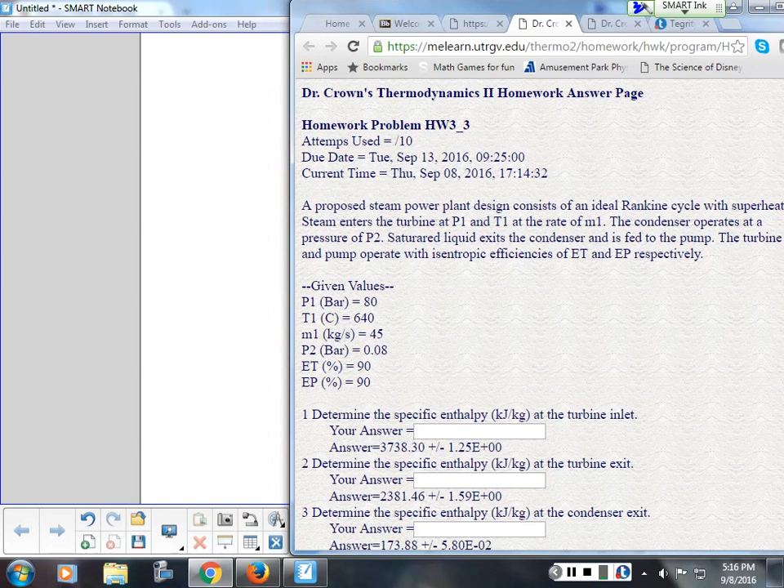Let's see if we can copy that problem back on top here somehow. I'm going to try and push it off to the side. I don't think I need the text anymore, just these numbers. If I can figure out how to get this... I don't know where it went, it threw it off somewhere. Come back. Very nice. All right, I'm going to pause this.

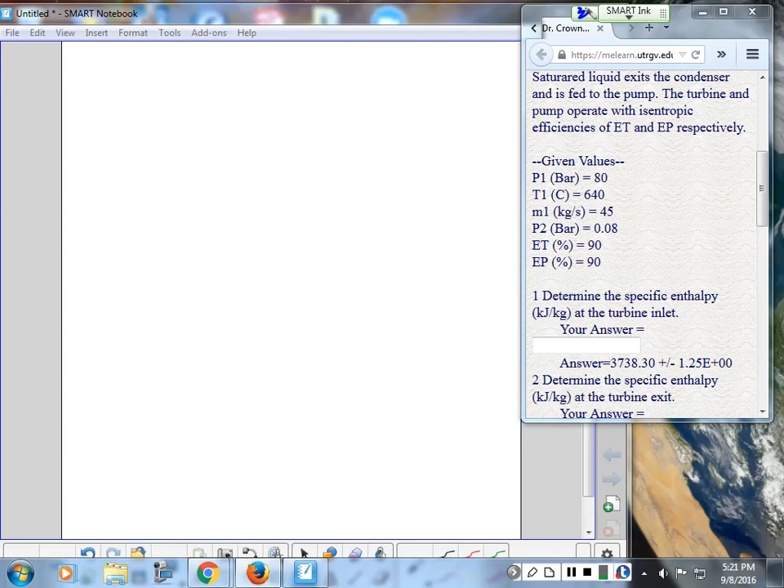So P1, T1, M1, P2. Let's just draw a quick diagram.

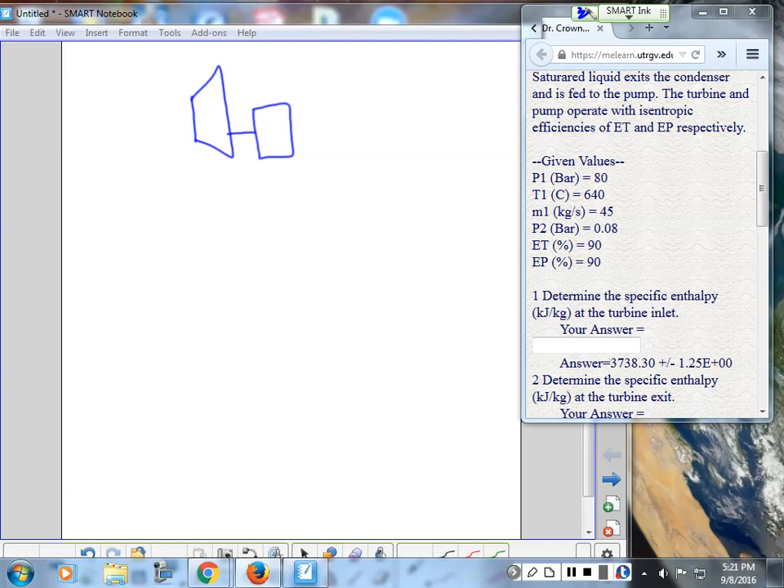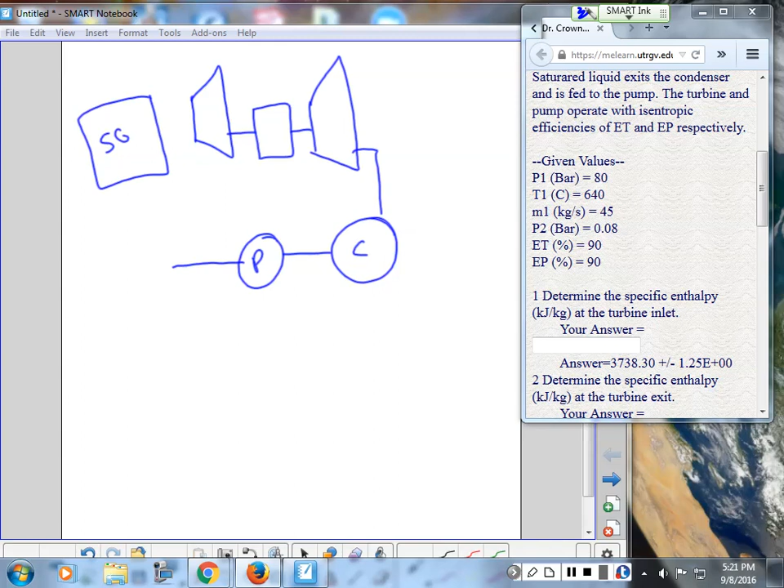Turbine, then it reheats, right? Is that what this problem was? It's been so long now, can't remember. And it goes into a condenser, goes into a pump, goes back to our steam generator, I think, or it doesn't even have reheat, does it? I better reread the problem.

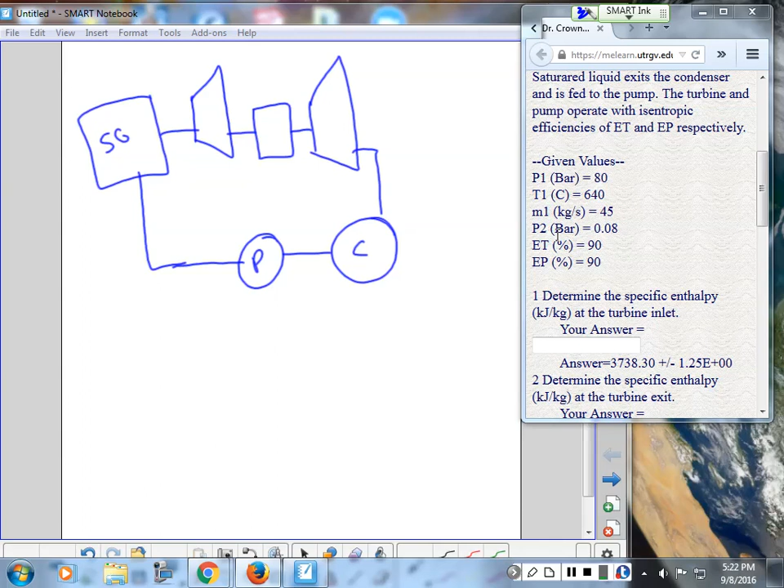Oh, with superheat, not reheat. Okay, so this is getting ahead, this problem would be for the next homework set. So this first set's really easy, it doesn't have reheat, it just has superheat. The only thing it has is isentropic efficiencies.

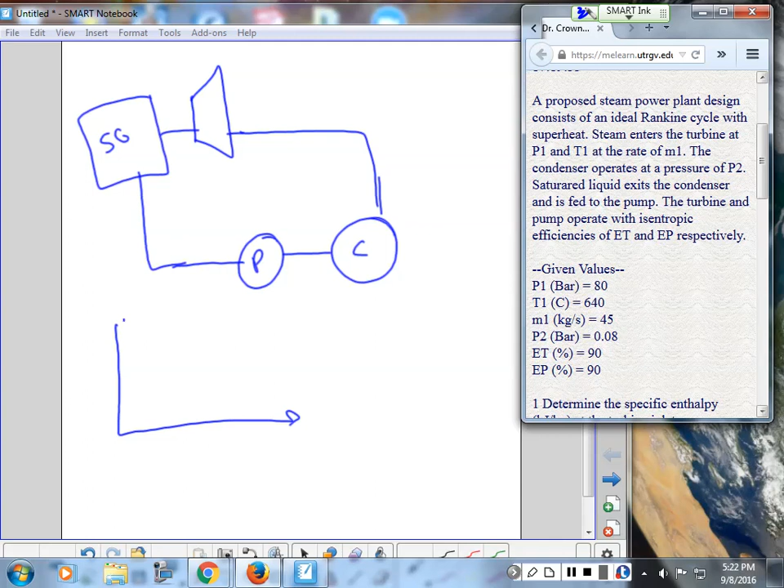So TS diagram: if I label that state 1, state 2, state 3, and state 4, draw a saturation curve. It's superheated, and it expands. Maybe it's saturated vapor, maybe it's a liquid-vapor mixture, so this doesn't have to be right there on the line. And then state 3, right there. State 4.

All right, so state 1 is easy. I know H1 is a function of T1, P1. Go to the superheat tables, look it up. That's easy, so superheat table.

All right, state 2 — I'm going to call this state 1, state 2S. I'm going to assume it's isentropic. Then the real state 2 we'll have to get. So state 2S says S2 equals S1, that's my assumption. And then I'm given P2, so my H2S is a function of

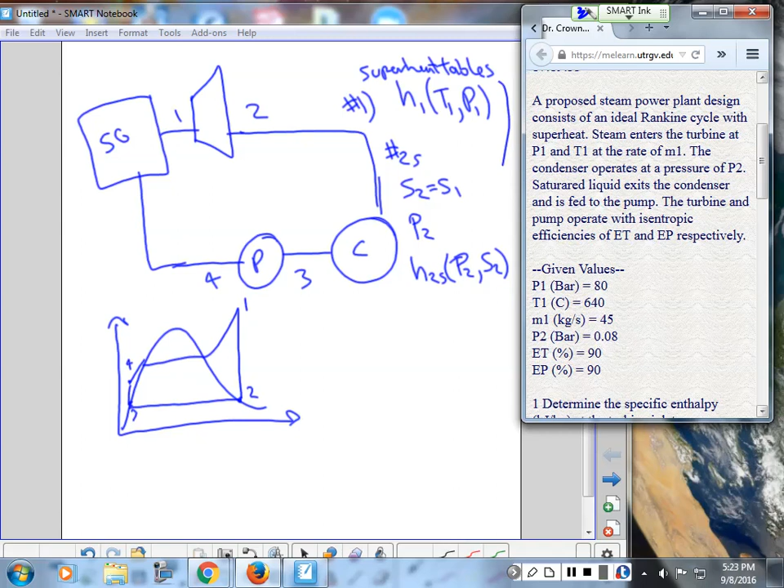P2 and S2. Again, superheat tables to find that. So I know entropy and pressure. Instead of looking on the left column for temperature, I look for entropy, and I'm going to have to interpolate almost always to find enthalpy.

Then, how do I find the real one? Well, the turbine efficiency, which I called ET, is going to be the actual output over the ideal output. So the actual is always going to be less than the ideal. So my efficiency is less than 1, so this is 90%. So what is the ideal output?

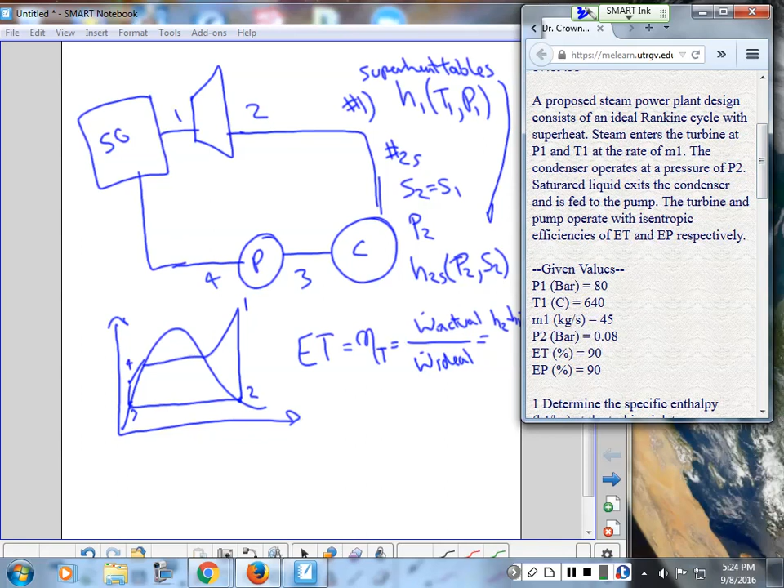So H2 equals the efficiency of the turbine times H2S minus H1, and then, well, that's actually H2, H1 — I guess that's a negative number. This is H2S, so plus H1. It's kind of a weird way to write it, but that's all right.

So this is a negative number times this, so it's less than H1. H2 is always going to be less than H1 because I'm getting the actual work. So this is kind of strange, a negative number over a negative number. I really should write it H1 minus H2, inlet minus exit is the work. Yeah, that's the way it is. So I just switched those, but it still works with the equation — it's just negative, negative of negative, so the negative work over the negative ideal. It's just kind of strange the way I wrote it, but this equation is still fine. Ideal is the same as isentropic, right? Yes.

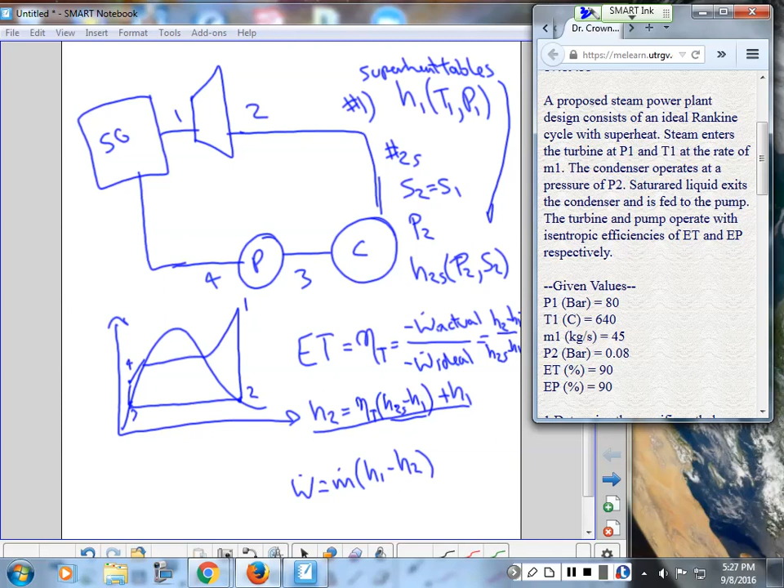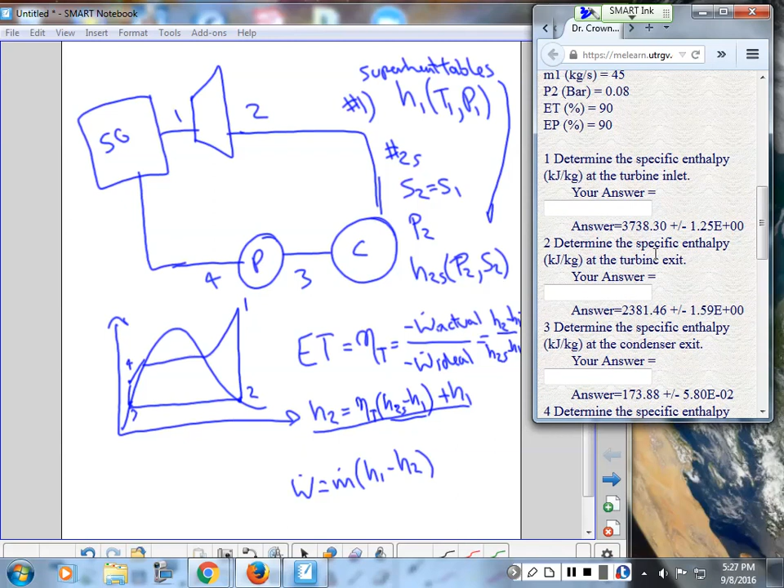So now I have H2, which was one of the first things asked for. Then we need to determine the specific enthalpy at the turbine exit. The inlet was easy, that was H1, we found that in the tables.

Next, determine the specific enthalpy at the condenser exit. We did the inlet and the exit already. Now the condenser exit is easy, that's just saturated, so H3 equals HF at whatever we're given, temperature or pressure. It's P2, right, at P2. So at 0.08 bar, we go to the saturation tables and look up HF because it's right on the saturation curve.

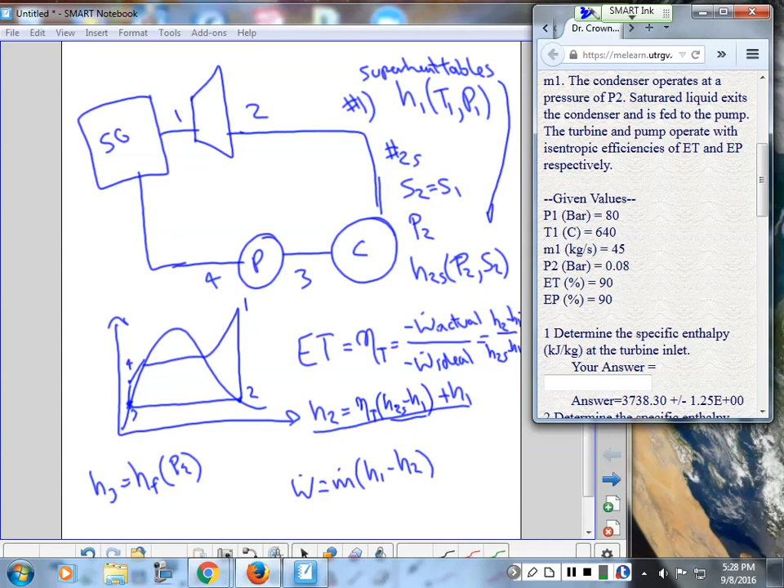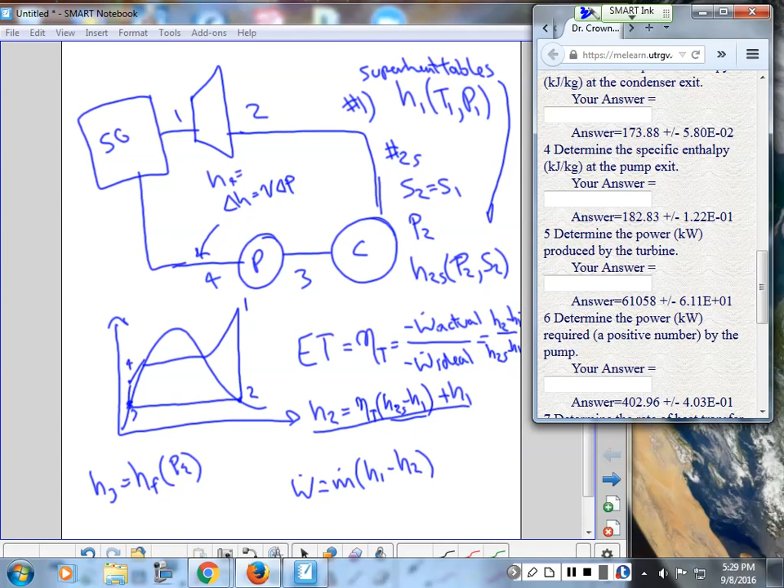The next thing asked for is the specific enthalpy at the pump exit. How do I get that? There's a number of ways to do it, but the work for the pump, if it's isentropic, is V delta P, so delta H for the pump. That's if it's isentropic. So H4 would equal H3 plus V3 times P4 minus P3.

Which V do I use? Well, it really would be V delta P plus P delta V, that's the definition of delta H, but we're saying the specific volume doesn't change in the pump because it's incompressible, so P delta V would just be 0. This is the pressure difference across the pump, P4 minus P3. I can use V4 or V3, since the temperature wouldn't change across the pump if it's isentropic, so the specific volume doesn't change. So this is just the inlet specific volume. H3 we already found, it's HF at the pressure.

So then I can solve for H4, if I wanted to do it that way. I was asked for the specific enthalpy at the pump exit, but the only thing is that's for 4S, because I assumed this equation was isentropic. So then how do I find the actual enthalpy? Same way I did before: the efficiency of the pump is equal to EP, which I called 0.9.

Now this is kind of the other way, we always put the larger number on the bottom, so the larger number is the actual work, and the ideal or isentropic work is a smaller number, because ideally you want less work into a pump. For the turbine, ideally you want more, so that's why they're flipped. The efficiency is defined differently.

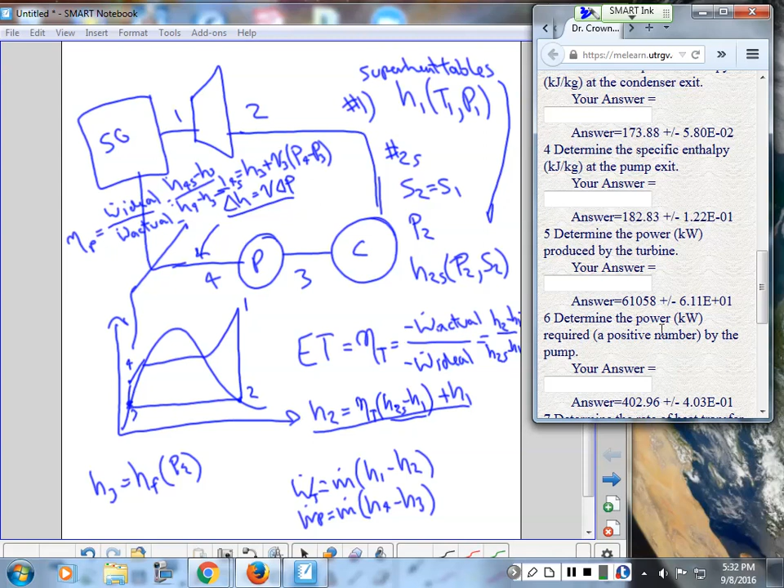And the work for the pump, I'm assuming that's the next question. M dot times H4 minus H3. Now it depends if I wanted to answer negative, but I usually view pump power as positive even though it's work in. So here I said a positive number, so the power required by the pump, I'll give that as a positive number.

And then determine the rate of heat transfer to the boiler. That's just the difference between state 1 and state 4. So Q for the boiler equals M dot, from 4 to 1, times H1 minus H4. That's how much energy is going in to raise the enthalpy.

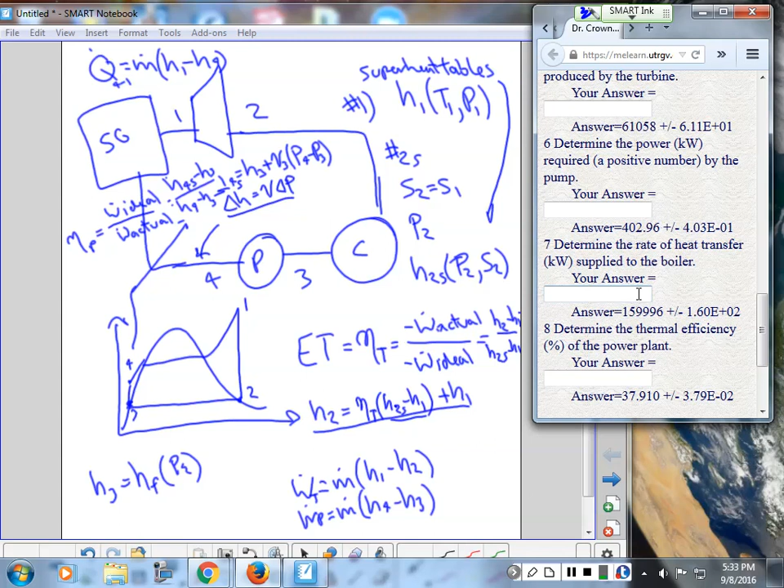And that's right here. And then finally, the thermal efficiency for the plant equals the power for the turbine minus the power for the pump divided by Q, which is Q4 to 1.

This is a basic Rankine power plant, but with isentropic efficiencies. This is the hardest one of the next homework set. The other ones have no isentropic efficiency in the turbine or the pump, so those go really fast.

The problem is that will tear up your turbine, and a pump can't take a saturated liquid vapor mixture. So it's impractical, but it does represent a theoretical maximum for these operating temperatures, because the Carnot cycle is a reversible cycle.

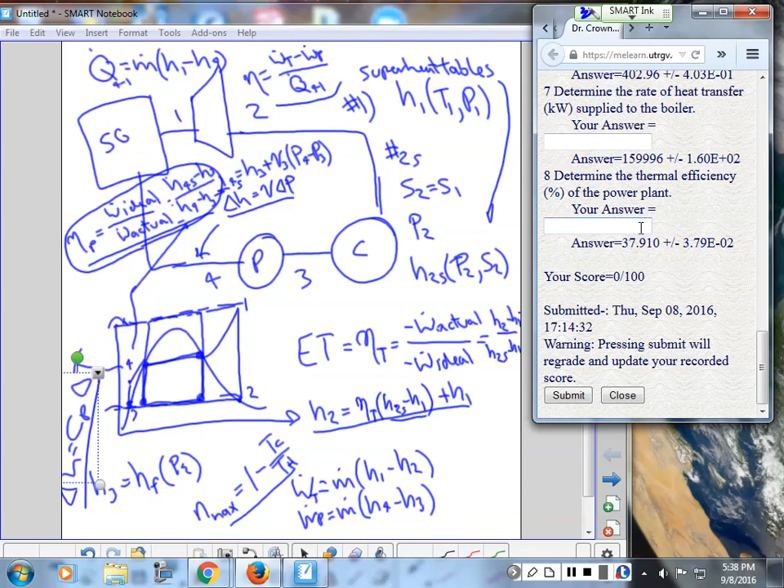Now, sometimes you can use the average specific heat if you know what the final temperature is going to be, and then use that specific heat in that average range. So you can get away from using the tables, and we do that a lot of times. When we look at some other problems, we're going to make those assumptions. It just makes the problem solution a lot faster.

And then maybe at the end, after we've done a bunch of quick calculations, we want a really accurate answer, then we go to the trouble of looking at tables and things. Occasionally that's an okay approach. I would make sure you're comfortable doing it both ways. And then if I say do not assume constant specific heats, then you know you can't do that. Sometimes they do say that in the problems - use variable specific heats means don't assume constants.